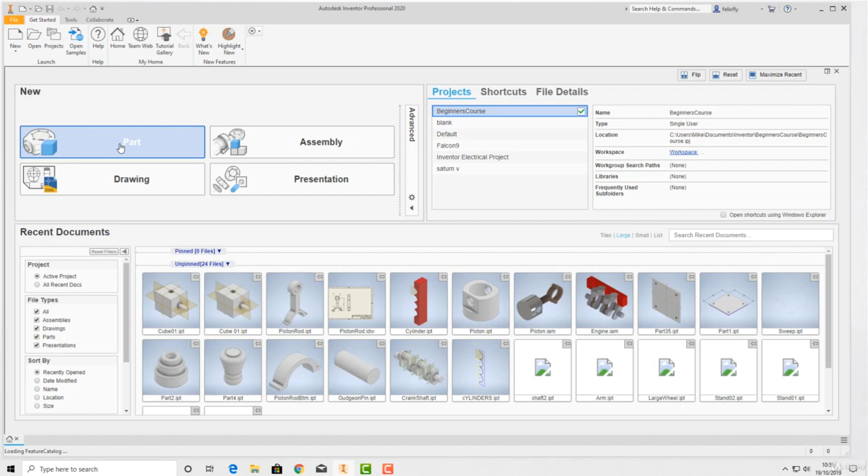Okay, so let's draw a basic part now. We'll go to Part and click to open a new part file. This is a basic part that I call the wedding cake, which will be obvious when we draw it. This could be something turned down in a lathe, designing a wedding cake, but it could be something metal, or some kind of plastic bung used in a hole, or part of an adapter for a hose. You'll see anyway when we draw it. It's just an example, but you could see this shape in a variety of places in the real world.

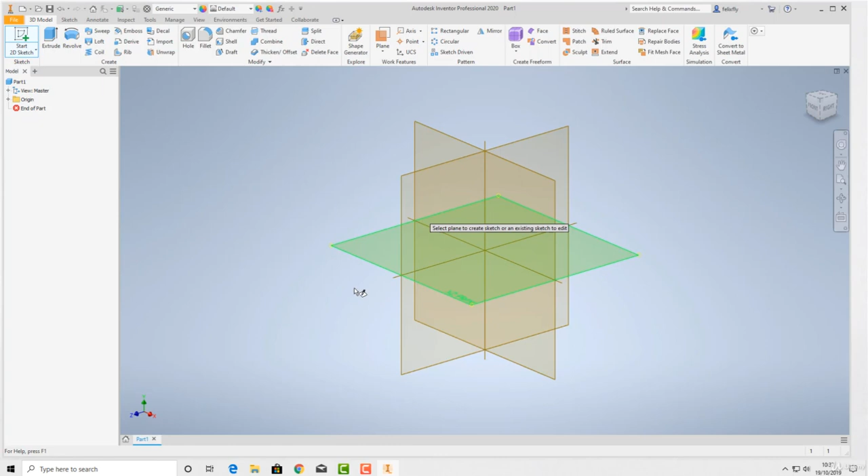So we're going to click on Start Sketch, and we're going to go to this plane here. We're going to build it upwards off this plane, so we'll click that one, and we're going to do a center point circle and click on the center origin point. You'll see it snap there, so left click, and I'm going to type in the diameter, and I'm going to make it 300 millimeters. Press enter.

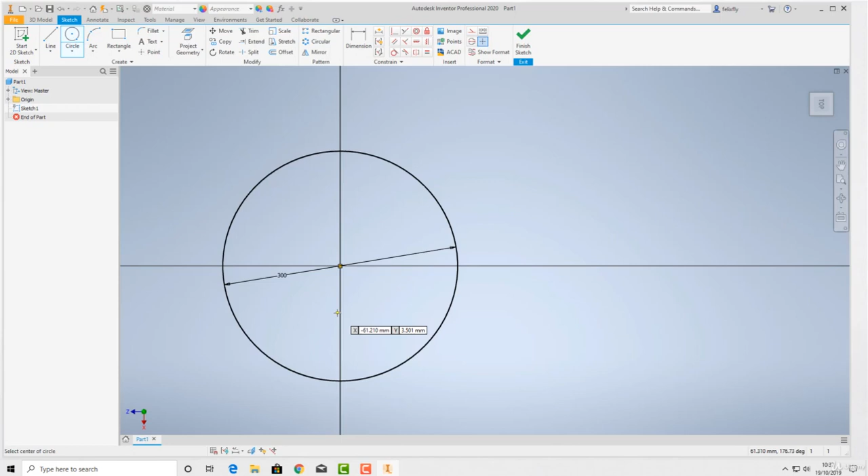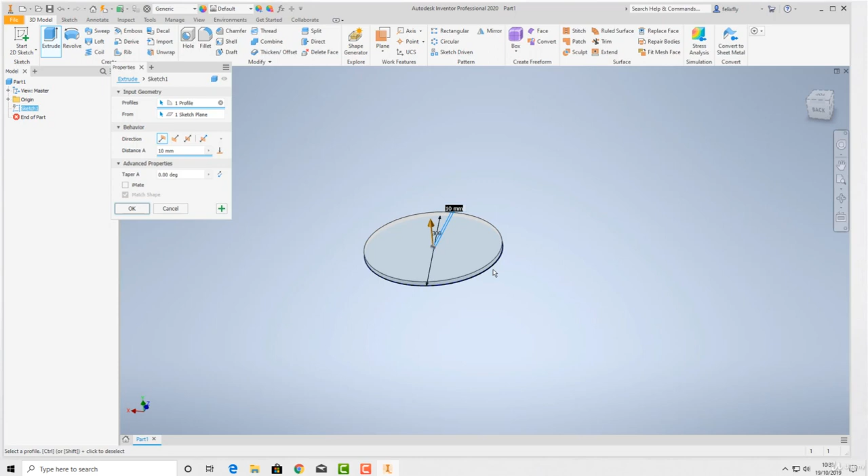Okay, so now I'll finish sketch, and we can see, and if we hold down shift and middle wheel we can move around, but we've got our 300 millimeter diameter circular sketch there. So when I click extrude, it's going to, if it doesn't guess the sketch, you can click in it to make it that circle, which is our only sketch in our browser, so it should choose it automatically. And we're going to make this 100 millimeters. Okay, and that's all I'm going to do. If it's going down, then you change it to up. If I was doing this either side, then I'd make it symmetrical. In this case, I'm just going to put it off the plane upwards, because there isn't any symmetry in this axis.

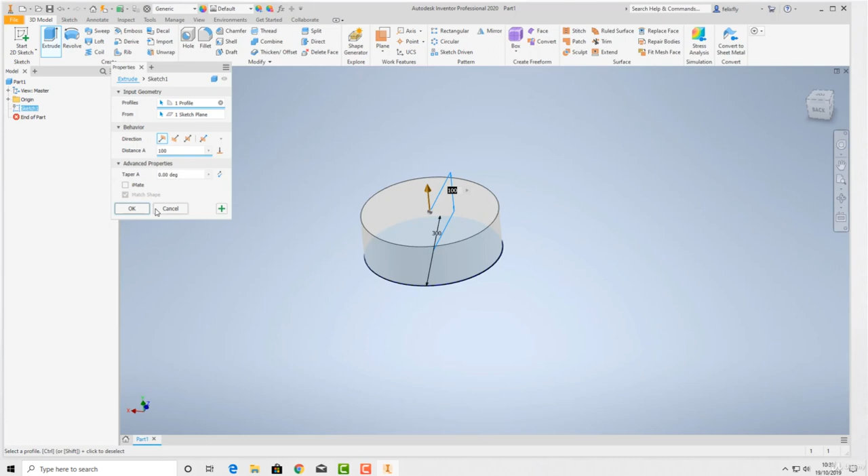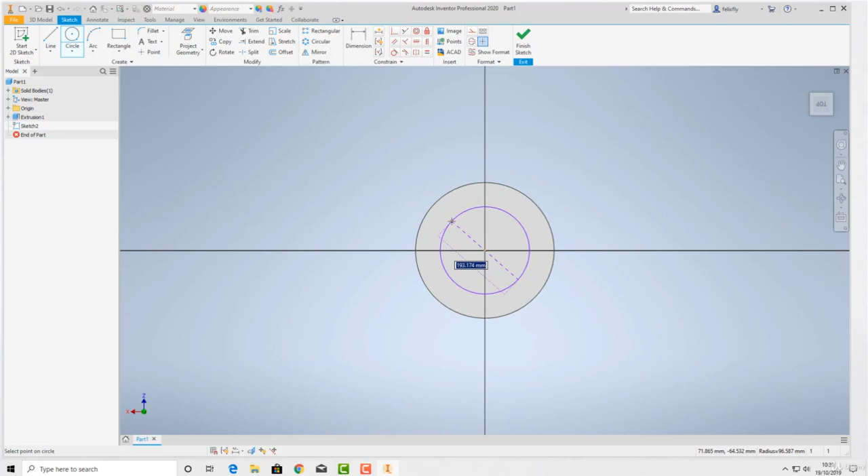So I'll click OK, and then we have our cylinder there, and I'm going to click Start Sketch again, and now it's looking for either a plane or a face, a flat face to sketch on, so I'm going to choose this top one here, and I'm just going to do the same again. I'm going to do a circle on the base point. This time I'm going to make it 200. Okay, finish sketch, extrude, again select, set to 100 and click OK.

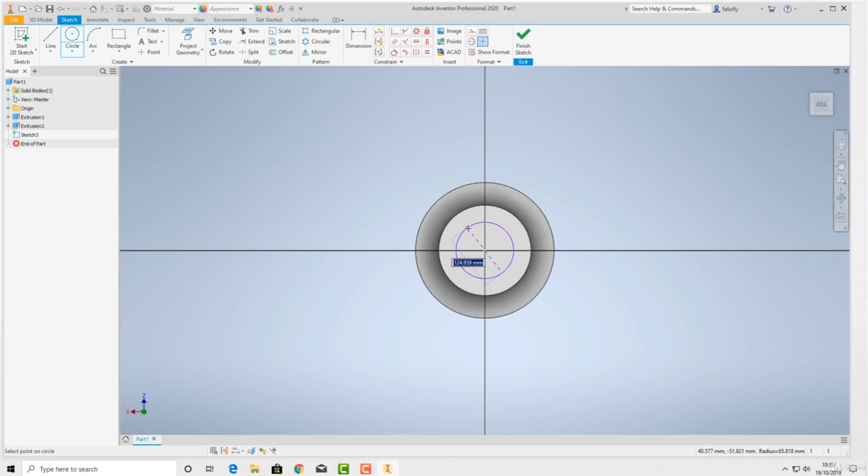So you can probably guess what's going to happen here. We're going to do another sketch on there. We're going to do another circle, and let's make this one 100. Finish sketch, extrude, 100. Okay, there we go.

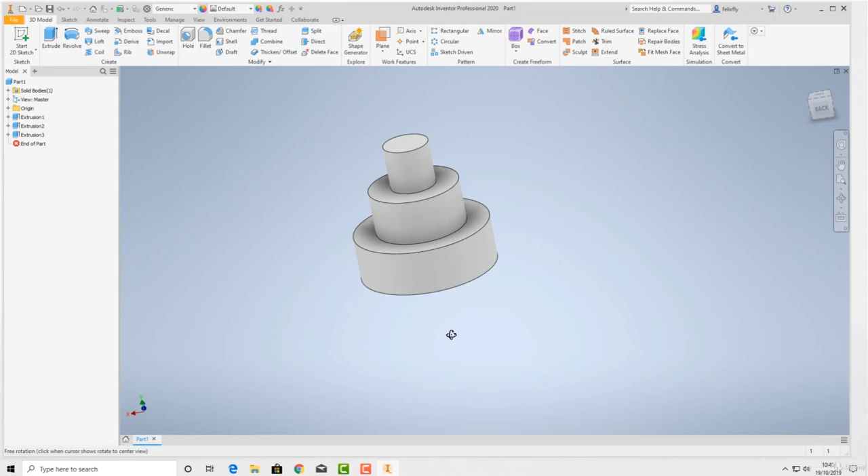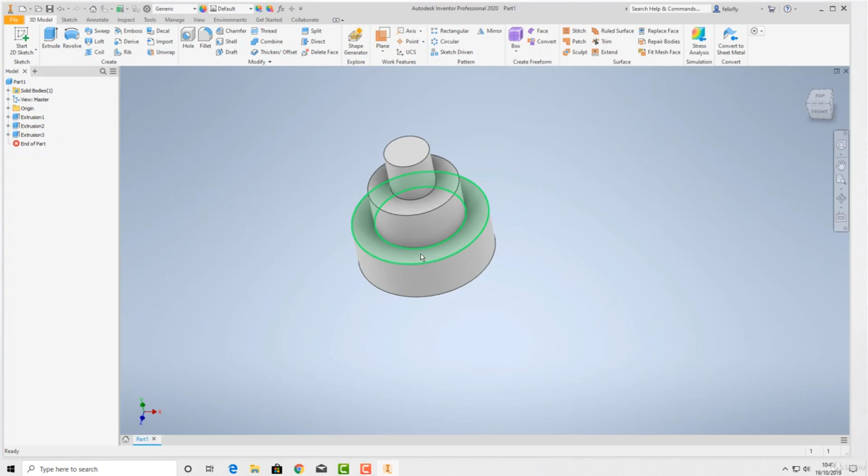So you can see why I called it the wedding cake. It's a very basic part, but you could probably see this could be used, like I say, turned on a lathe, turned down metal or even wood maybe, but yeah, it's a demonstration of using sketches not just on work planes but on faces of objects you've already modelled. So we created a cylinder, and then we chose to sketch on that face of the cylinder and built it out that way.

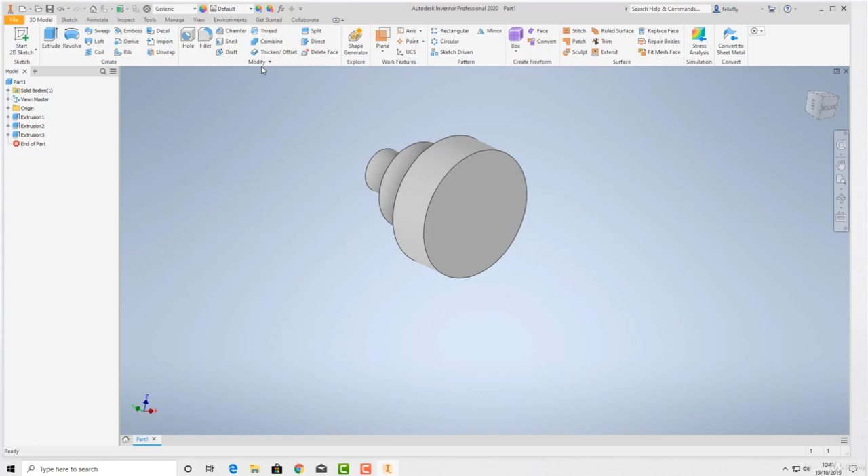And what we can do is I'm going to do a sketch on this face, and I'm not going to draw a circle here. In fact, what I'm trying to do now, if I finish, you can finish once you've created a sketch without either finishing the sketch or even putting anything in there, and it will keep it as a sketch. It's ready. It's very ready for you. So I'm just going to tell you what I want to do.

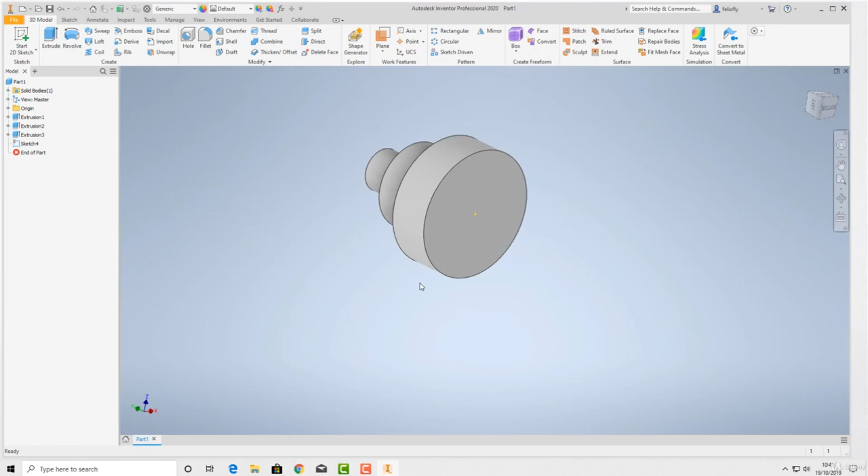What I want to do is put a hole right the way through here. Now, you can do a sketch on here and draw a circle and then extrude that through as a cut, but I want to show you this command here. This is a hole command, okay? Now, you get a lot more options if you use this rather than just cutting a hole.

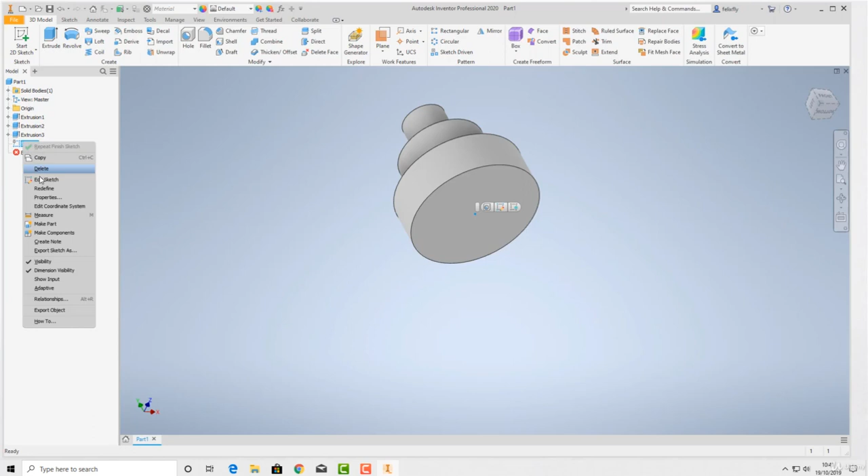But you do need to give it a sketch to work from. So I'm going to click on this again. We never actually put anything in this sketch. I'm going to edit it, and I'm just on that center point. All I'm going to do is select point, and I'm going to drop a point there.

Now, as I said, point is just a marker. Think of it, imagine you were measuring a piece of material to drill a hole. You measured it out, and with a pencil you just put a dot of where you're going to drill. That's basically all we've done with that point.

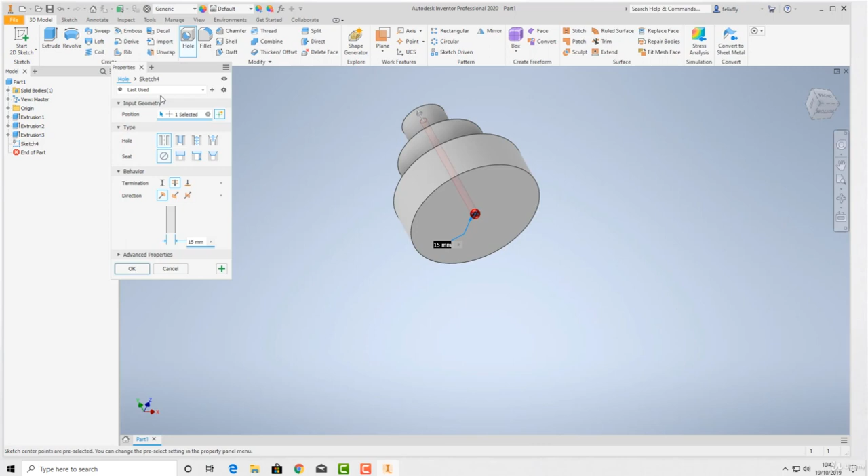So now I click on hole, and you see we have all these options. Again, with most things in Inventor, you bring up a new box like this and think, oh, that looks complicated, but it's just a case of working through it. You can see, as usual, it's guessed where it thinks we want our hole, and it's correct. So that's this position, one selected, yeah, so that's already done.

So you have different holes. You can have a simple hole, a clearance hole, a tapped hole where you can actually put a thread in it. Or you can have this one, which is a taper tapped hole. These will be, depending on your background and where you're coming from, familiar to you.

Generally, I'll just use a simple hole. Now you can have a seat, so that's like a countersink, or a counter bore, you know, something like a hex head screw would sit in there. So you can choose to do these, and if you do, it'll give you all the options.

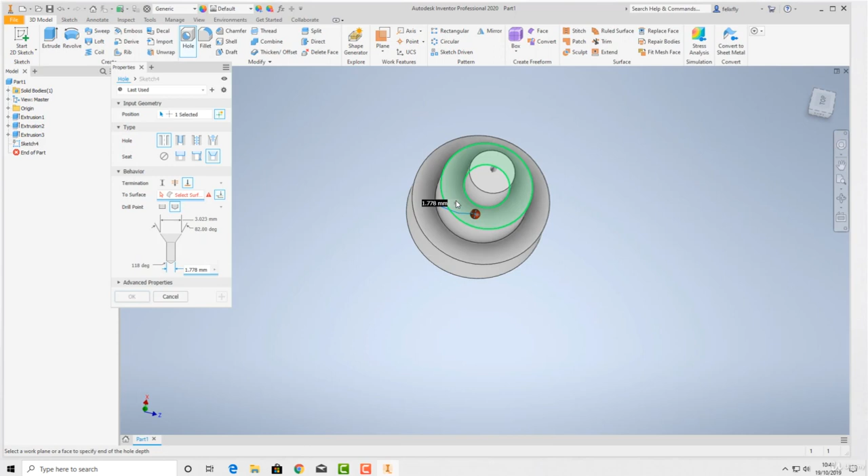For now, we're going to go to simple hole, termination. So do we want this to go all the way through to a plane? If we clicked onto a plane, we could choose maybe it only went to that plane there, and you see the hole stops. Or you can choose distance, and you can actually type in a distance.

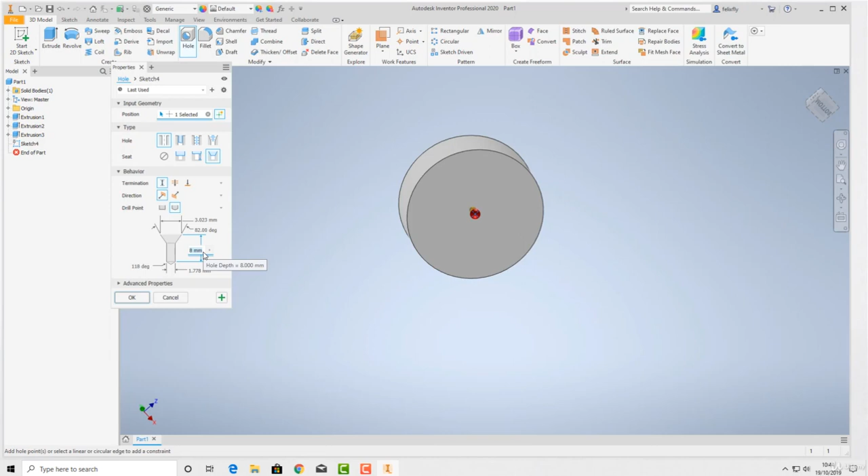So if we choose simple hole and distance, then you can see the things it's asking us here. So the hole depth, you could change that, maybe 200. You can also grab this arrow. Usually wherever you've got an option here, you'll see an arrow and you can just grab it, but it's much more precise if you type things in.

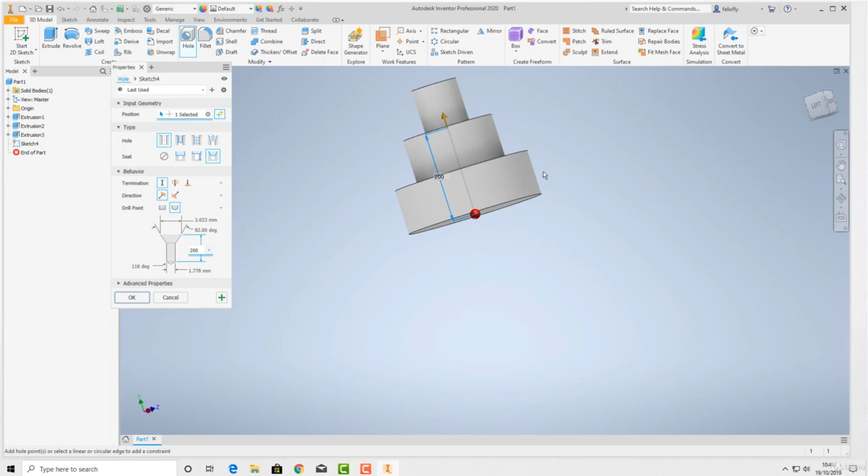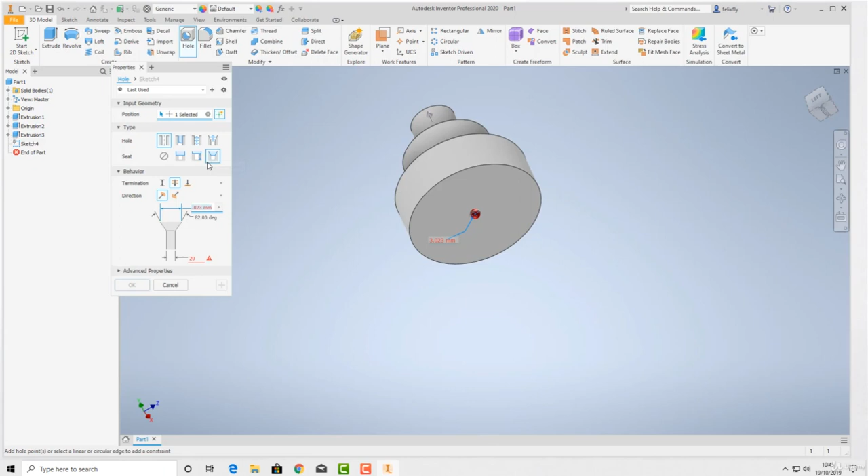But in our case, we're going to go through all. And then the diameter of our hole, I'm going to do a 20, let's do a 20mm hole. So we've actually selected countersink — I'm going to put that back to none. I just want a basic hole all the way through, 20mm diameter.

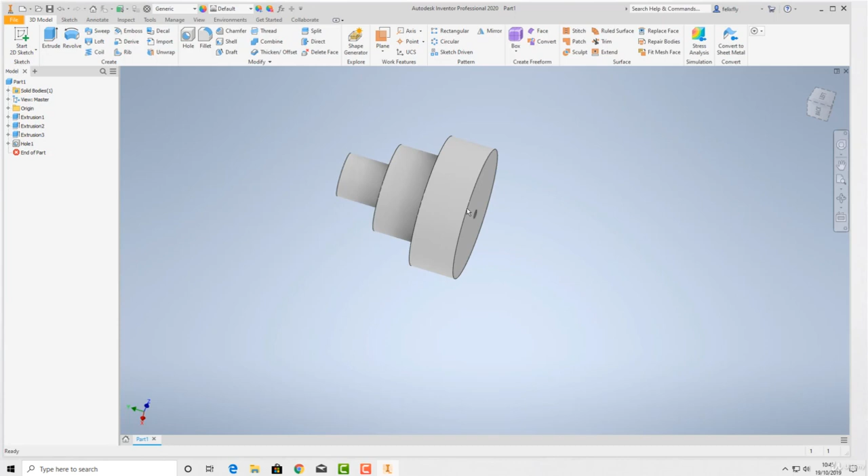So I'm going to OK that, and there you can see. So it's looking like some kind of spindle or something now, but that is a basic shape. It doesn't look — it looks a bit too basic. It doesn't even look like a wedding cake, especially now it's got a big hole through it, but never mind that.

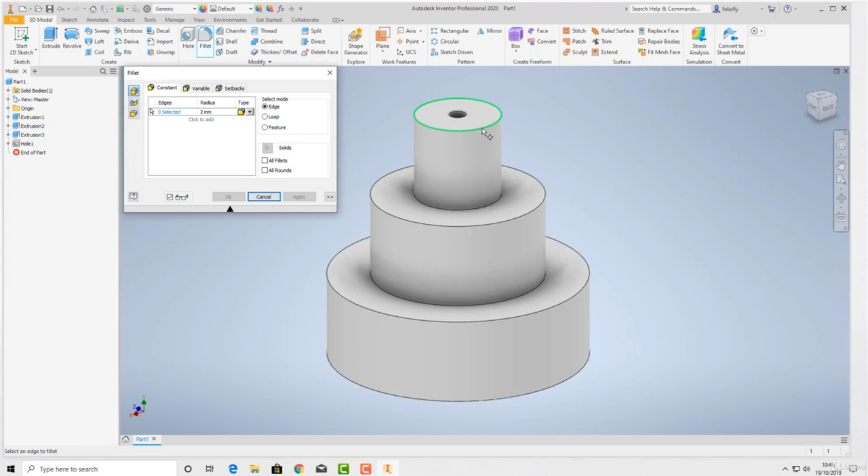One thing I'm going to do is, you see these edges are a bit sharp, so I'm going to put a fillet on those, which is this command here. So we select that, and it will ask us a radius. Generally, if you're kind of doing something by eye, it can be hard to judge — we knew we extruded 100mm, so 2mm is probably going to be quite small, but you can just click it. So you click the edge you want to fillet, and you'll see it gives you like a preview.

So you might want to turn that up a bit, not 55. Let's try 10. Yeah, okay, so 10, and you can select more than one edge. So now we've got a 10mm fillet on here, so it's rounded that edge.

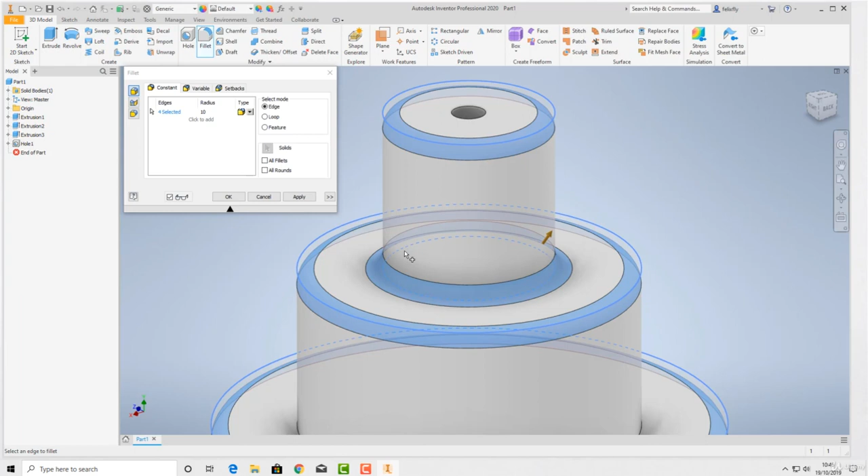You can also use an internal edge like this, so it rounds it the other way, and it gives you that nice kind of machined look. And then we'll select OK, and there you can see.